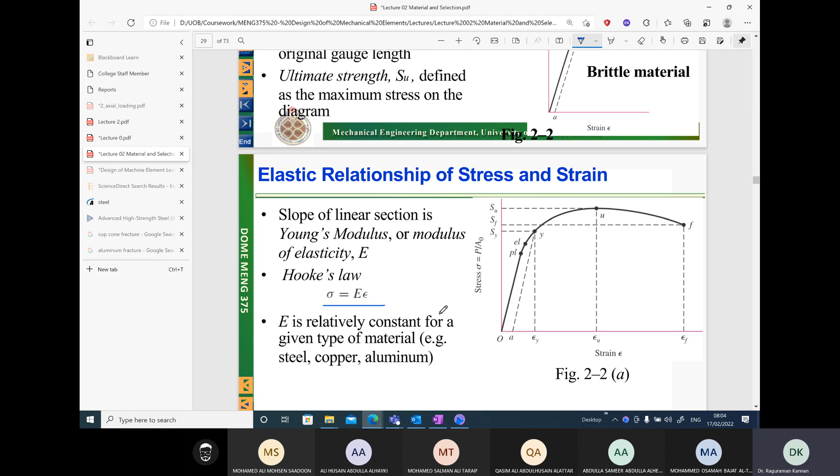Okay, so we'll continue from last class. If you recall, we went through the tensile test and I briefly discussed different properties: ultimate tensile strength, proportional limit, yield strength, and fracture strength, and regarding Hooke's law, for ductile materials and brittle materials.

Now we will go for compression. In the case of compression, how do materials behave? Generally, for ductile materials, the ultimate strength in compression and tension are equal. The properties are generally equal.

But there are exceptions. For some ductile materials, this is not the case. Ultimate strength in compression and tension can be different, especially if the ductility in the material is approaching that of a brittle material. So what is ductility?

We will define that as well. Ductility could be defined as the strain at fracture. So it is equivalent to the strain at fracture. If the strain at fracture is very large, then it is a ductile material.

But if you take a brittle material, the strain at fracture is going to be very small, reaching the elastic strain or the proportional limit strain. It will approach the strain at the proportional limit. The strain at fracture will approach the strain at yield point. If that is the case, then it is a brittle material.

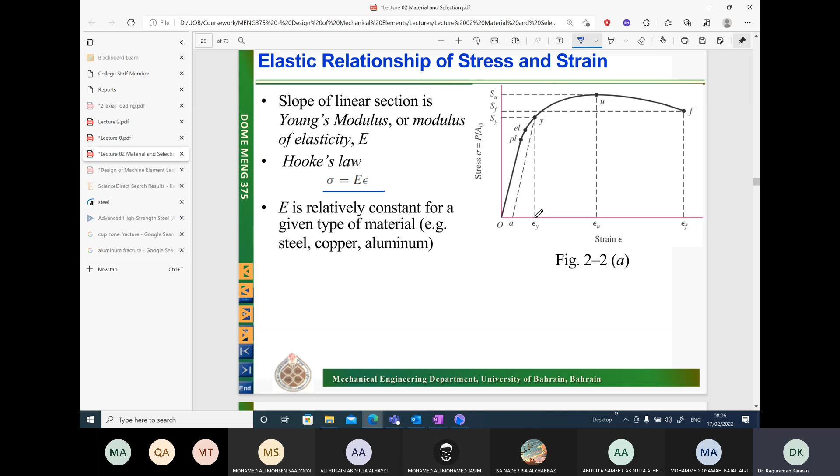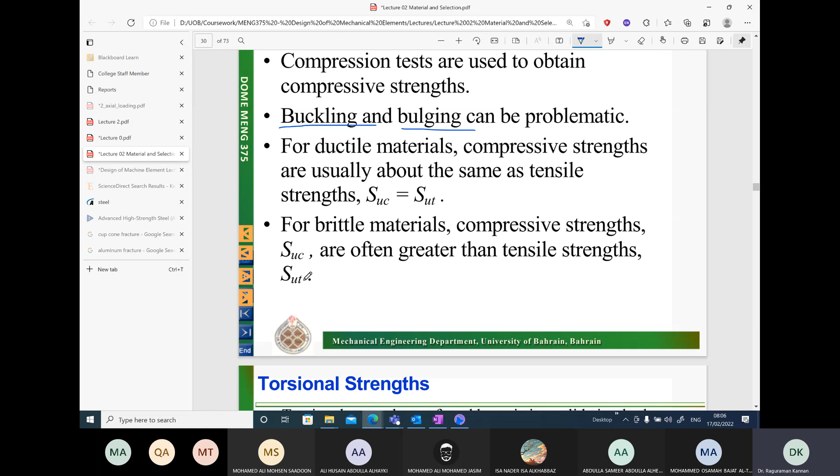So especially for ductile material, if the strain is coming closer and closer towards the yield point, then you may have a condition where the ultimate strength in compression will be different from the ultimate strength in tension. For brittle materials, always the ultimate strength in compression and tension are different. Compressive properties are different from the tensile properties.

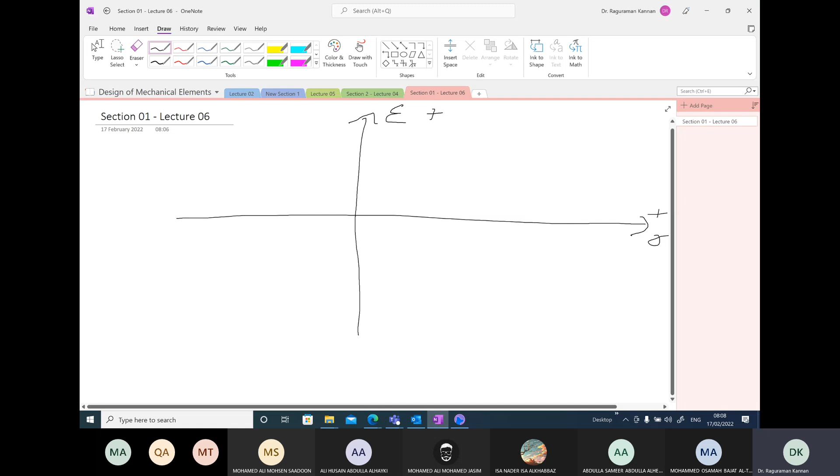So now it's okay. If you take a brittle material and look at the stress-strain diagram, let's say this is the positive stress, positive strain, and then we have the negative strain and the negative stress. Sorry, this should be stress and strain, I made it opposite. Should be stress, strain.

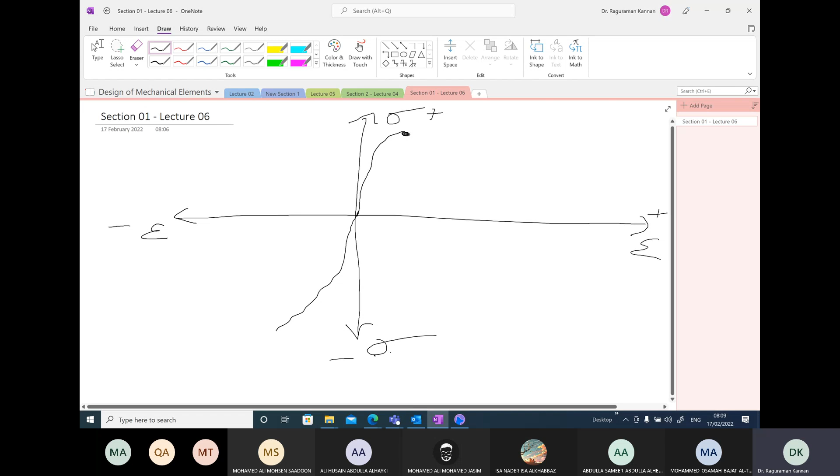So if this is the case, generally for brittle materials, this is what you are going to observe, then fracture. On compression, you are going to see much larger values like this, fracture here. So in compression, you will have different properties. In tension, you have different properties, especially for brittle materials and some ductile materials as well.

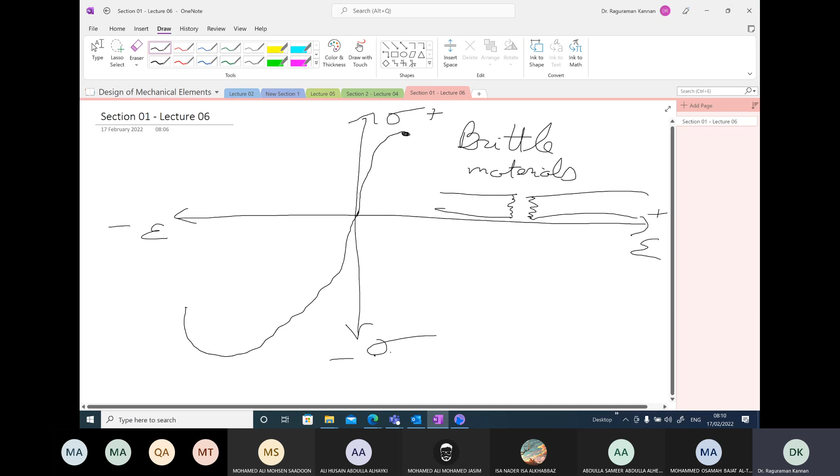In tension, you had cup and cone fracture for ductile materials. For brittle materials, you will have a straight edge. So if you see the fracture, especially in tension, the fracture will be with a straight edge. While you go for compression, what happens? You are going to see probably some bulging effect like this, and then fracture.

Okay, so what about torsion? We can also do torsion tests. In the torsion test, you are going to get a torque versus twist diagram. There you can use strain sensors, strain gauges to measure twists and then draw the torque versus twist diagram. From the torque versus twist diagram, you should be able to calculate the shear stresses.

How do we calculate shear stress? We can calculate shear stress using the formula: torque times the radial distance. So radial distance, I'm going to write it as R, over J, where J is the polar moment of inertia. So we can convert applied torques into shear stresses, and there will be shear strain.

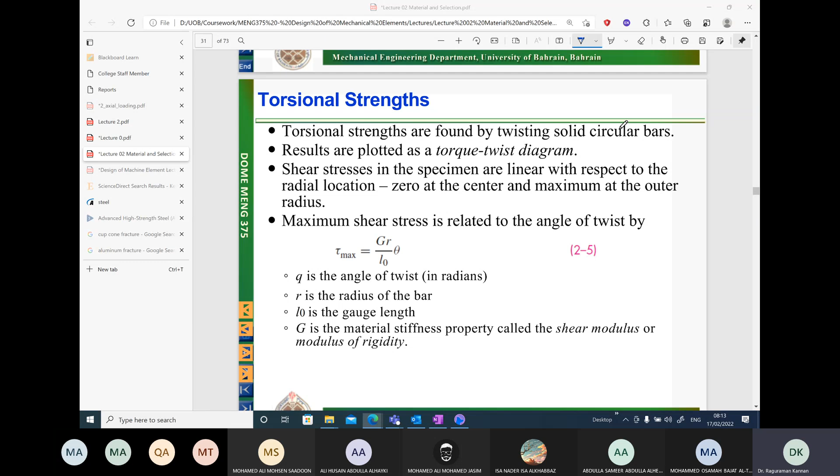How does the shear strain diagram look like? It will look very similar to your normal stress strain diagram. You will have a yield point, then reaches a maximum value, and then fracture.

So in this case, in the initial part, we will get what is the shear modulus. Based upon the shear modulus, we can write the Hooke's law for shear stress. So we can write tau is equal to, let us say, G times gamma.

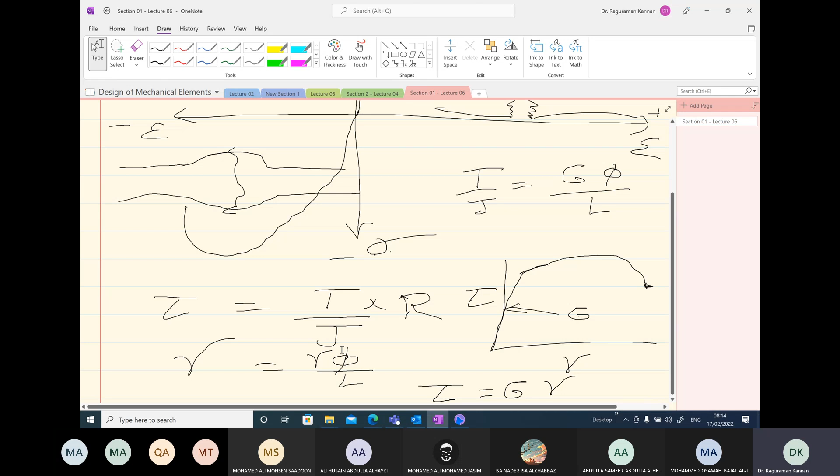Based upon this relationship, we can come up with a form of strain equation. So the strain here should be phi times, radius r could also appear here.

There is another property which is called the modulus of resilience. What is modulus of resilience? In the stress strain diagram, we have the area underneath the elastic part of the curve.

Within the elastic part of the curve, this is the elastic part, before the yield point, we can call it elastic region. And between the fracture point and the yield point, it is called the plastic region.

So the area of the stress strain curve under the elastic region is called the modulus of resilience. What does it give you? It gives you the energy absorbed per unit volume without undergoing permanent deformation. So it gives you an idea how much energy can be absorbed by the material under quasi-static loading. This is not under impact conditions, but rather under very slow loading rates, how much energy the material can absorb, that is given by the area under this curve.

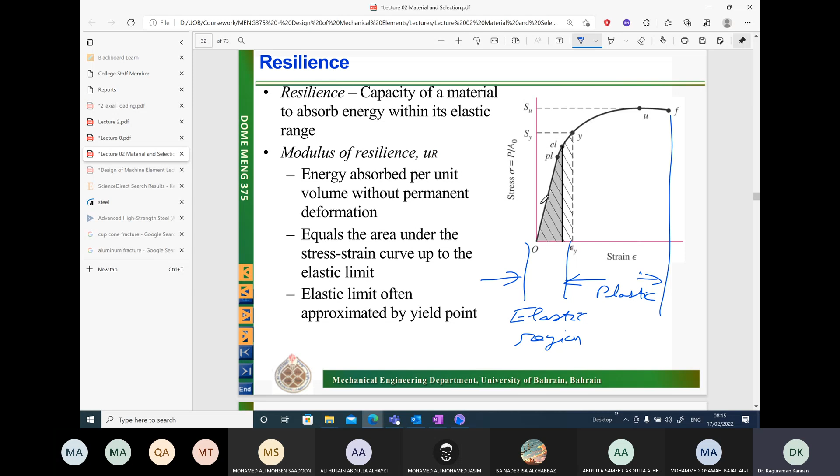So if you were to measure the modulus of resilience, how do we measure it? By taking the area under this curve, half into base into height. So we can approximately take this height to be the yield strength. Half times Sy times the base length here will be equal to the yield strain value. Approximately this is equal to this value here.

We can use the Hooke's law within the yield point. Let's assume up till the yield point the Hooke's law is valid. We can replace the strain, yield strain, by yield stress over E value, and then approximately write the modulus of resilience as this. But if you look at the units here, Sy has the unit corresponding to it, pascals, which

is equal to Newton per meter square. And if you take the strain unit, strain is dimensionless. So what is the unit of this product? It's still Pascal, Newton per meter square. But here, modulus of resilience has the unit of energy. UR is supposed to have the unit of energy, but energy per unit volume.

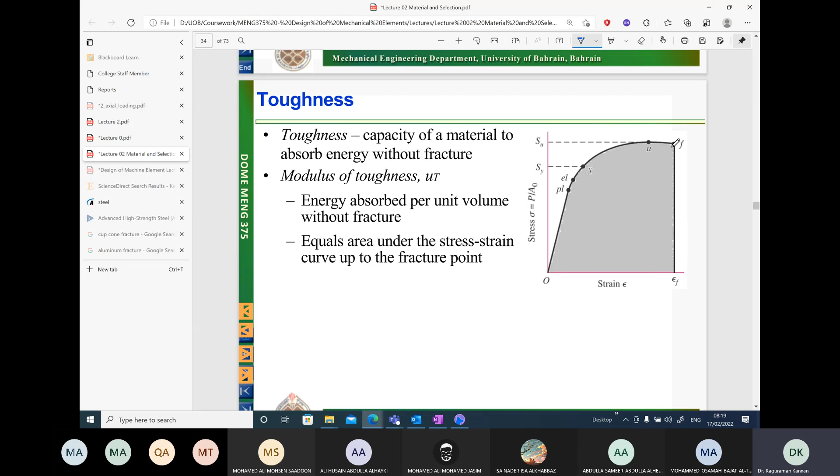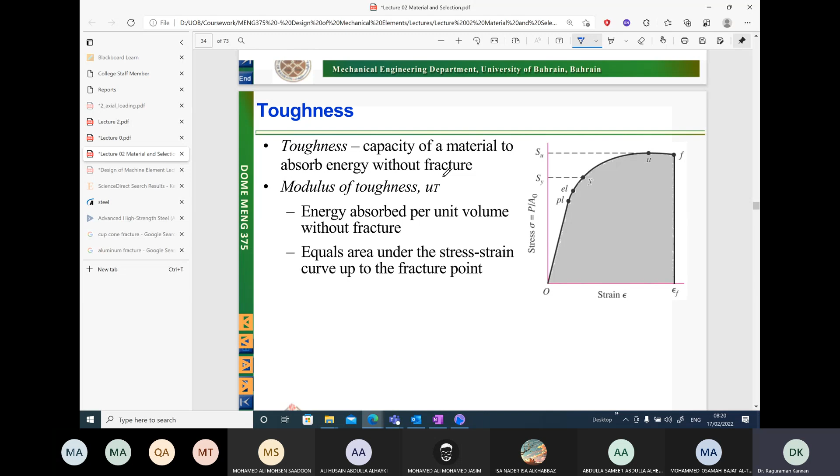Toughness is the total energy the material can absorb before undergoing fracture. This total energy per unit volume is given by the area under the stress-strain curve up till fracture. This modulus of toughness property cannot be used in situations like these pads.

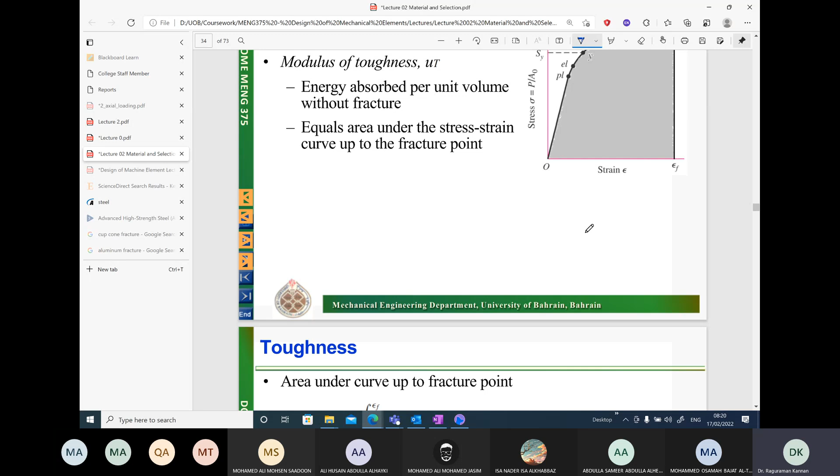Now we have to realize, suppose if you have some other padding material which is absorbing energy under impact conditions. In those cases, we cannot use modulus of toughness or modulus of resilience because those are under impact conditions, while these energies are under quasi-static loading, that is, a very slow rate of loading, not a high rate of loading as in impact conditions.

An example of impact conditions: in bridges, you might have seen big columns, and if you carefully observe, you'll see some kind of padding around them, especially around the base. Why are these paddings given? If some vehicle comes and hits at a very high velocity, you don't want the column to break. Rather, this padding will absorb all the energy of the vehicle and protect the column.

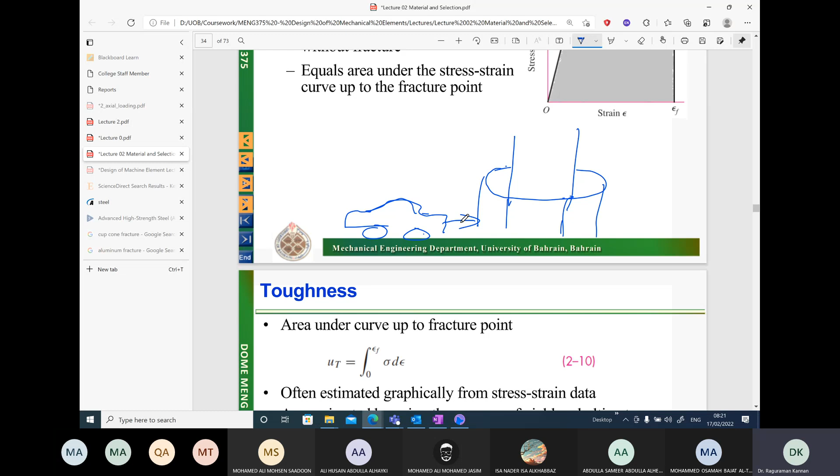So this is under impact conditions, and under impact conditions, you cannot use modulus of toughness or modulus of resilience. It will be wrong to use these.

So how do we calculate the area under the curve? Usually we will have some approximate relationships in the plastic zone between stress and strain. These relationships are just like Hooke's law, generally called constitutive relationships or constitutive equations. Hooke's law is one example, where sigma equals E times strain, within the elastic and proportional limit. But beyond the yield point, sigma may be a function of strain.

For example, there is one simple power law relationship: sigma equals A times epsilon to the power n. So under the plastic part, you may have multiple relationships for different regions, and using these mathematical relationships, you can integrate and figure out the area under the curve.

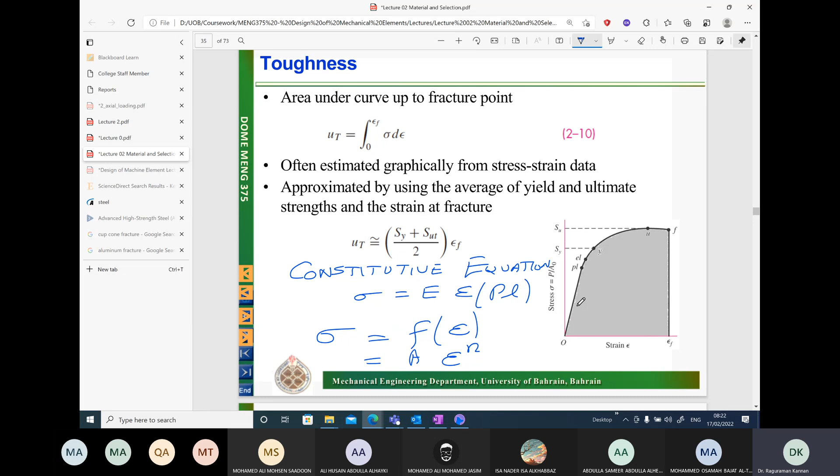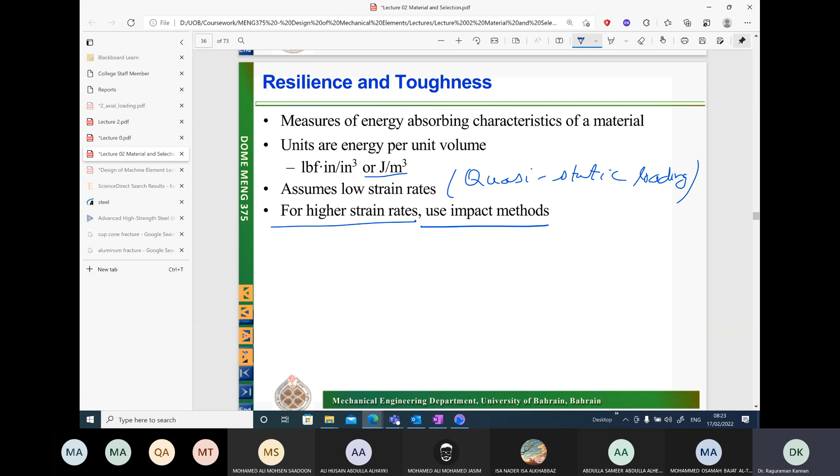We have already discussed the units, joules per meter cube in SI units, with English units given here as well. This measures the energy absorbing characteristics of the material, and it assumes a low strain rate, meaning quasi-static loading, or slow loading rates. However, for higher strain rates, we cannot use these properties; we have to use impact methods, which we will see later.

Cold working - what is it, and what does the process do? Cold working increases the yield strength of the material by plastically deforming it below the recrystallization temperature. Can one of you tell me what is recrystallization temperature?

Can anybody explain to me what is recrystallization? The crystals change shape. What do we mean by crystals? What is a crystal? Like BCC and FCC structures. Okay, BCC structure. But what is recrystallization? What does it mean? Does it mean that from BCC it becomes FCC? What does it mean?

So if I say I'm working below the recrystallization temperature of steel, what does it mean? It means reforming of the metallic bond. No, not actually that. So how, just by applying mechanical forces, would that happen? This is about temperature, right? So are we melting it? Are you saying that recrystallization temperature is the melting temperature of the solid?

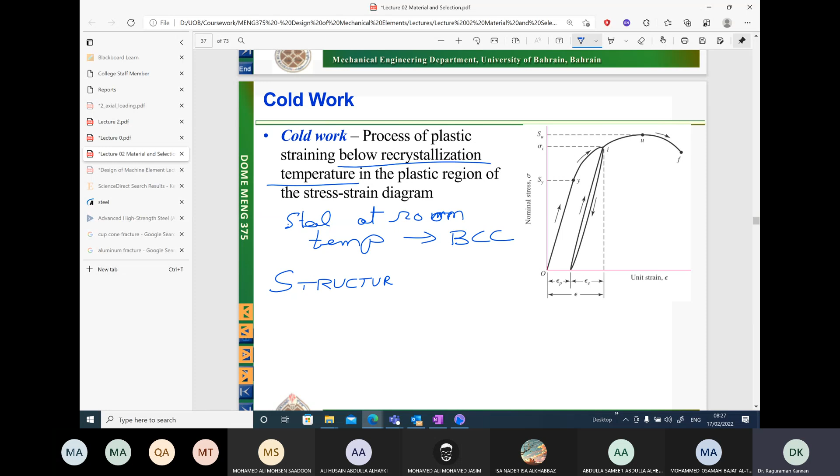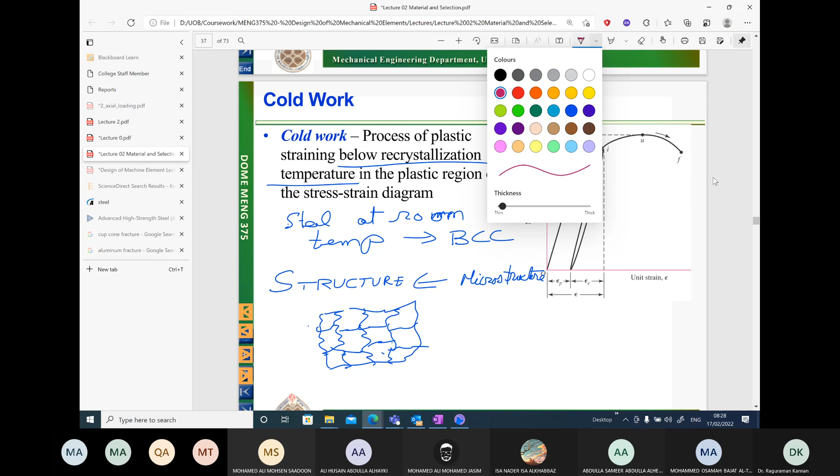Microstructure - if you look at the surface of any material under a microscope, you are going to see grains. What are grains? These grains refer to the specific orientation of the BCC structure within the material, in the case of steel. In one grain, the orientation of this BCC structure may be like this, while in the neighboring grain it can be a different direction. Why do we have these different directions in each grain?

Because when solidification takes place for the material, suppose you have liquid material inside a crucible. As I cool the material down, at various points solidification will take place, and the BCC structure will start to grow in different directions.

So here it will grow in this direction, and here it will grow in this direction. Slowly the grain size will increase. Here it will grow in a different direction and the grain size will increase. Similarly, when solidification takes place, there are different points where solidification occurs. The size of the grains grows, and the direction in which the structure grows will all be different. Finally, they meet at certain points, and these points become the grain boundaries.

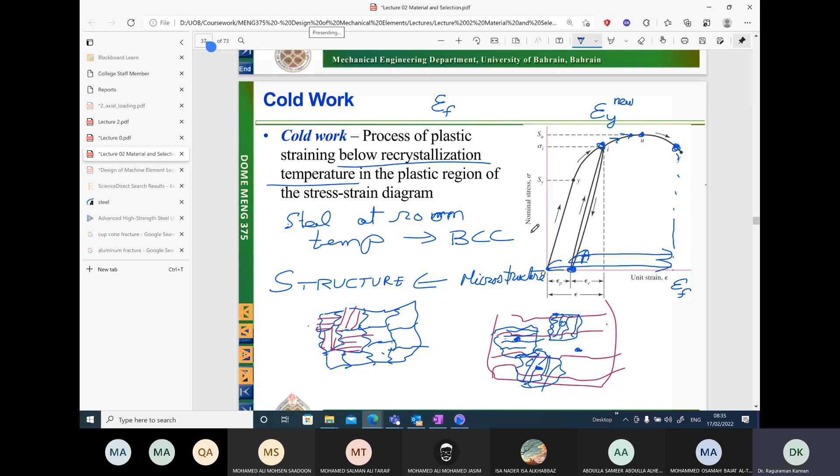We have seen before that advanced high strength steels overcome this limitation of cold working process by applying other manufacturing techniques, including heat treatment, cold working, mechanical processes, and adding additional elements within the material, causing precipitation of certain materials within the microstructure of the steel. Thereby it will increase ductility. What we have seen here is ductility reduces as yield strength increases. If ductility reduces, the ability of the material to absorb impact loads also decreases. But in sophisticated manufacturing processes, not only does yield strength increase, but fracture toughness also increases for the material. Fracture toughness or ductility also increases.

Now let's go to a property called hardness of the material. What is hardness? Can any of you define it? Have you heard of this term? The strength of the material to resist a localized pressure, or localized deformation. So, strength of the material to resist local plastic deformation. That's a good definition. Let's not write it as strength, because strength is a well-defined property for a material. Rather, we should say ability of a material to resist local plastic deformation. This is the general definition that is given.

When I ask you what is the definition of stress, how will you give the definition of stress? How is stress defined? Anybody? Force applied over a certain area. Right, so I can write a formula. When I say stress: internal force over area of cross section.

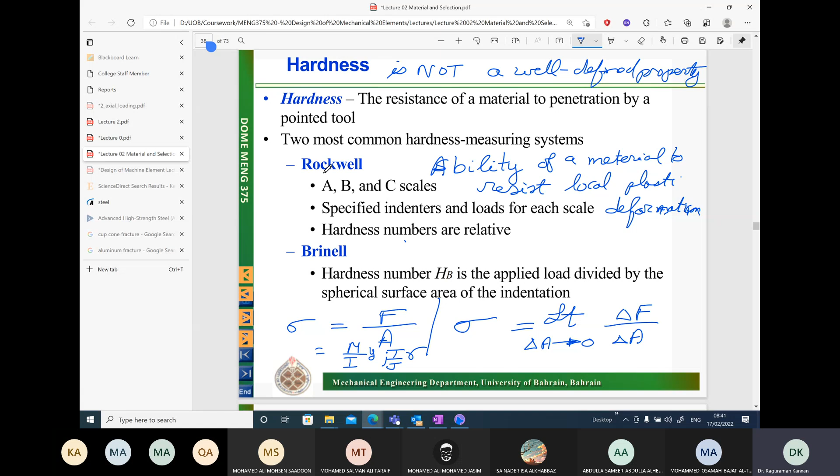Have you seen such a single mathematical formula for hardness? Again, stress is well defined with a single formula. No matter what test I do, if I want to mathematically calculate stress at a point, this is the formula I will use. It doesn't matter whether it is a torsion test, tensile test, compression test, or bending test. Have you seen such a well-defined formula for hardness? No, because hardness is not well defined. Yes, that is the answer. Hardness is not a well-defined property. In fact, there is no formula for hardness like there is for stress. We can use some theory and derive these formulas. If you go for hardness, what is the theory? Have you seen any theory? No theory also. No theory behind hardness.

What do we have? Just the layman definition. That is all we have. What is the layman definition? Ability of a material to resist local plastic deformation. What the hell does that mean? How do I calculate anything out of this? Nothing. It means nothing.

So what the hell is hardness finally? We really do not know what we are measuring. We do not know what we are doing. But somehow we have a feel of what this property of hardness is, just a feel.

Okay, and what do we do in the Rockwell test? We have different shapes of tools which go and penetrate the surface of a material locally, and when it penetrates, we apply different loads in each case.

In Rockwell, Brinell, Vickers, who decides what amount of load I should apply? Based on what? Nothing. So we do some experiments, but we do not know what we are measuring, why we are applying certain force, why the tool bit used for penetrating a particular material has a particular shape. None of these we know.

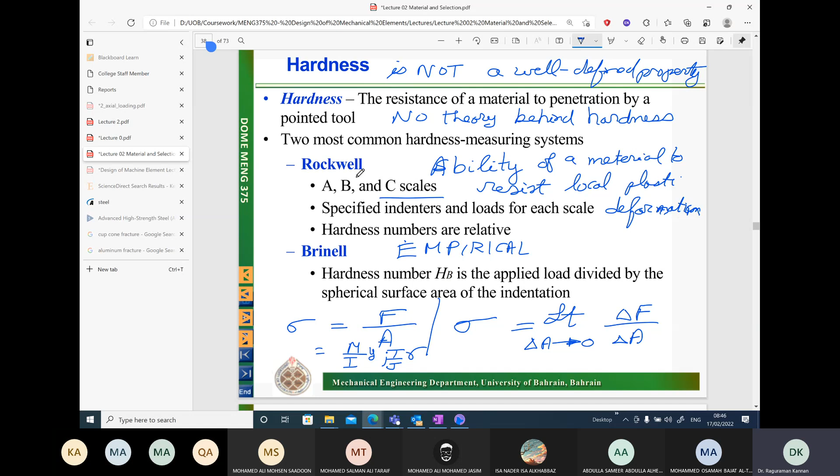So this is one practical application of these hardness values. There is also another practical application. There is a way to empirically relate these hardness numbers, these relative numbers, to a property like yield strength. We can empirically relate them through graphs, and by doing so, we can get the yield strength and the ultimate strength for steels. The empirical relation gives this based upon, let's say, Brinell hardness number in SI units and English units.

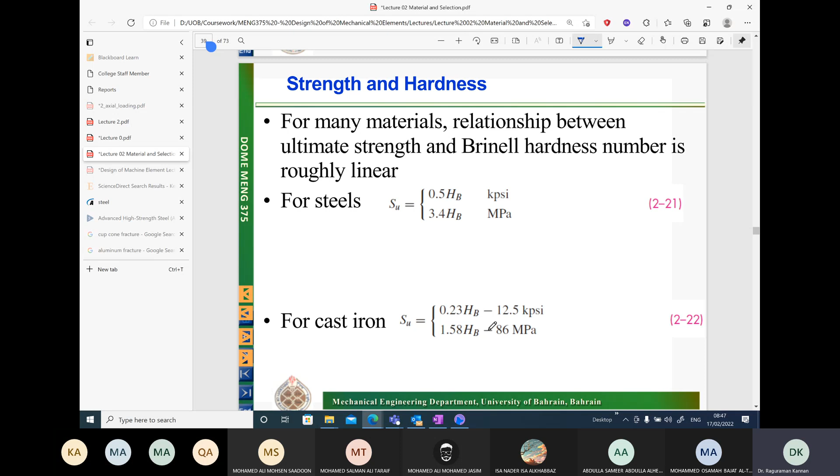For cast iron, another empirical relationship is also given. Again, these are empirical formulas, not based upon any theory. What is the use of these formulas?

Suppose you are in a field and you want to test whether the imported materials are according to the standard. You cannot pick each and every material, go to the laboratory, do a tension test, and destroy the material. Rather, what you can do is use portable hardness testing machines. You take a sample, test the property — what is the hardness of the material — then use these empirical relationships and deduce whether the strength of the material is according to the standard you have. So that is another use for these hardness properties.

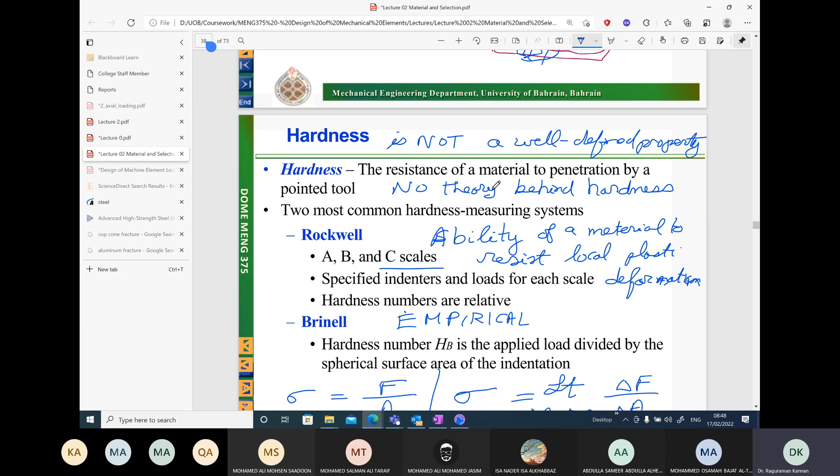What is the unit of hardness? Generally, since it does not have a proper theory, assigning a unit to these hardness numbers has no meaning. However, for practical situations, whenever I use the formula, inside the formula I can do some calculations based upon some units.

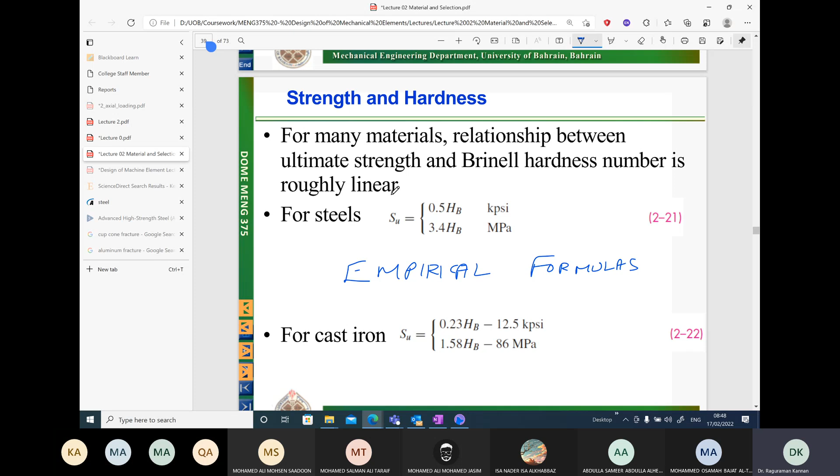For example, if you take the Brinell hardness formula, you may have a specific formula with some force quantity and some numbers based upon the radius of indentation, some function you might have, like the square root of f of r.

In what unit am I going to substitute R, in what unit am I going to put the F value here? We can see the different units, right? If you want it in KPSI, the hardness value HB also has to be calculated appropriately. When I substitute, I can put R in meters, R in millimeters, F in kilonewtons or newtons.

What unit should I use here? For clear specification on how I calculate HB, I will have units associated with it. When you are publishing data, you will have units associated with it for this reason. Not that hardness itself has a unit. Did you guys understand what I said? The property hardness does not have a unit. However, for convenience sake, they will put units when they publish the data. So that is the reason.

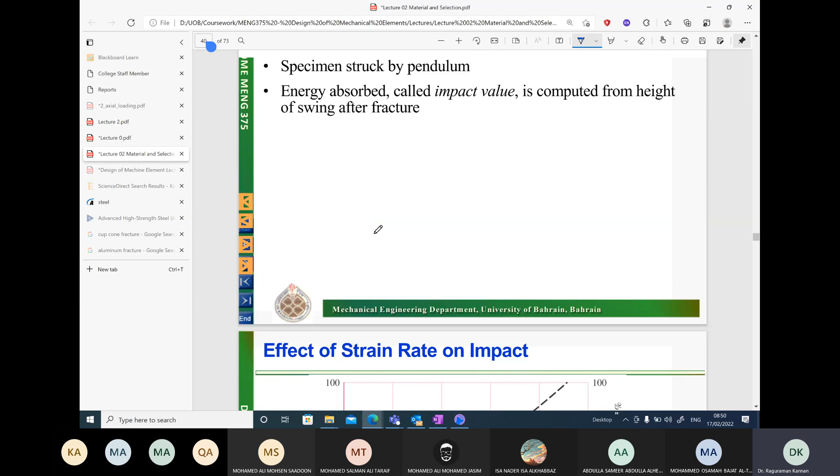So we have seen that, now we go for impact properties. There are various kinds of impact tests, Charpy test, Izod test. Charpy test is usually done to approximately identify what is the ductile to brittle transition temperature, another property we will discuss in this slide. But before going there, Charpy test is used for approximate identification of another property. Izod test may actually produce some material property data for impact tests.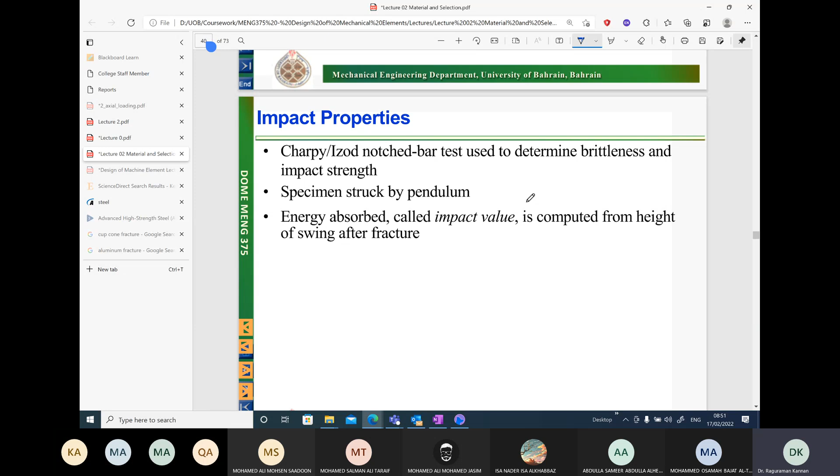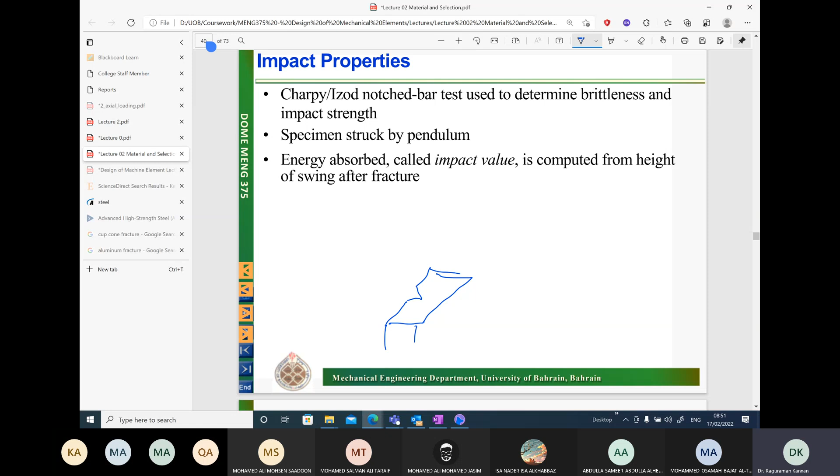So in both these tests, what do we do? Approximately, this is the case. What we do is we have a specimen. Let me try to draw the specimen here with a V notch like this. So we have a specimen with a V notch, and what they have is a hammer. Generally, a hammer is tied to a dial, fixed to a dial.

Maybe I should draw it near. The dial may have a pointer like this, and then you have the hammer. The hammer, when released, will go and hit the particular sample. The sample will be fixed on a base here. When the hammer goes and hits the sample, it will break the sample, and then the hammer will rise a little bit away. So basically, after breaking it, the hammer will rise here.

So this hammer will come to this position. Now, according to the hammer position here, the dial will also change its location, and it will give you how much height the hammer has raised. So you have the initial position of the hammer, and therefore you can calculate what is the potential energy of the hammer simply using the formula mgh.

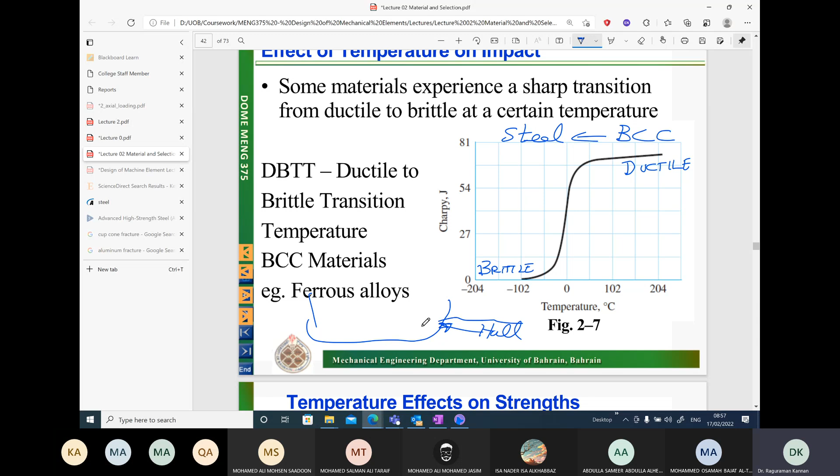The Titanic hull - what is hull? Hull is the portion of the ship here, in the water, this portion is called hull. So it went and hit against the iceberg. It was sub-zero temperature, the material became brittle, cracked, and failed. The water went inside the ship and it sank. So this is one of the reasons for the Titanic failure.

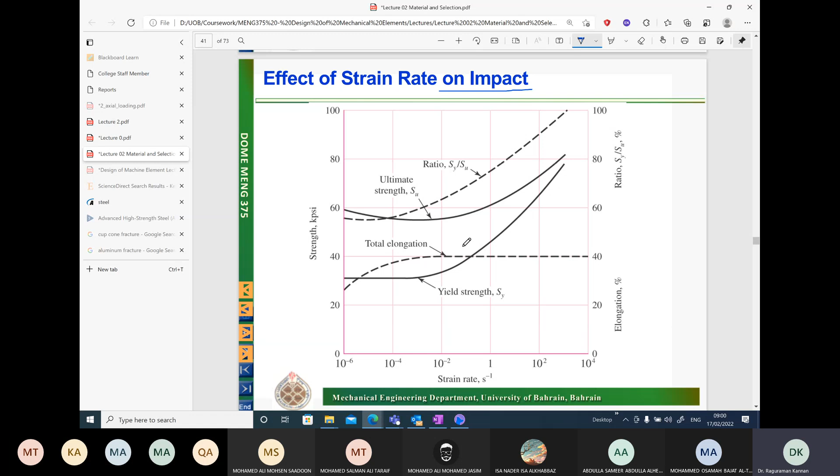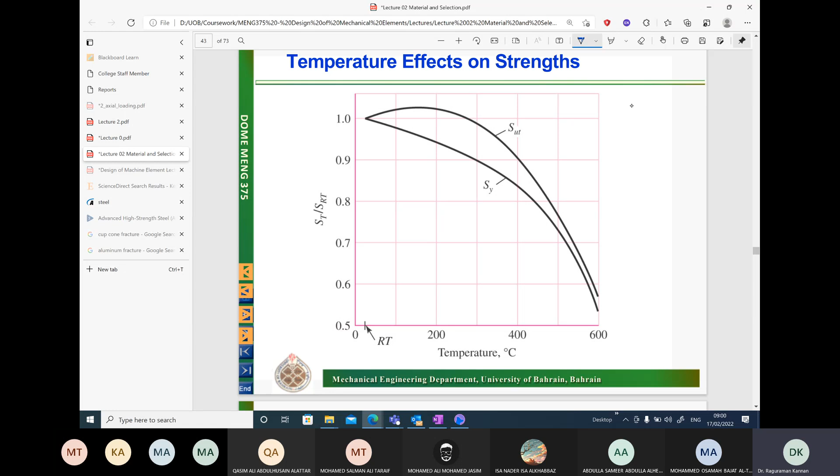So we already went through this - temperature effects. What happens to properties under quasi-static loading when I increase the temperature? The material will become softer and softer. And this is important to understand creep properties.

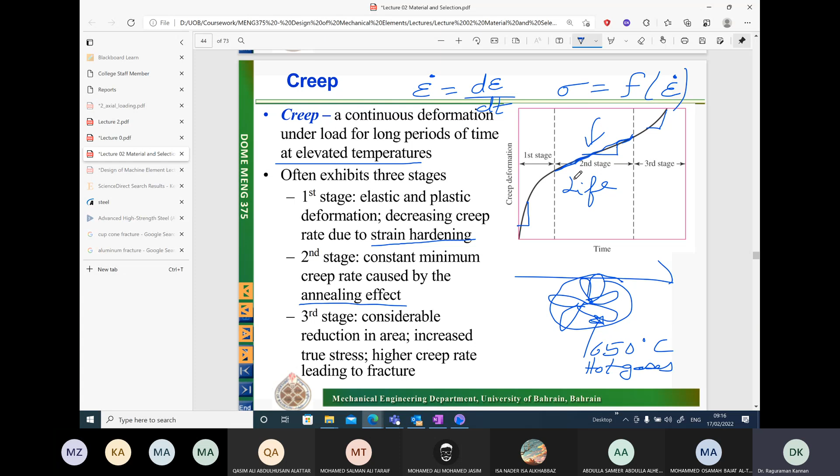So how do we determine the life of a specimen? We model creep in the second stage. Here, when we say model, we obtain the relationship between stress and strain rates. I put an epsilon with a dot above it - what does that mean? It is a time derivative, d epsilon over dt. It's a function of strain rate, not just strain. Based upon these relationships, we will be able to obtain the remaining life of the specimen. This is very important for identifying the life of members.

You might have come across the cold working process - we just went through that. There is also the hot working process, where the material is heated above the recrystallization temperature. So a process in which metal is formed while heating above recrystallization temperature is called hot working process.

Refined grain size is what you get from this process. If you want refined grain size, you do hot working. Depending upon how you cool down, you may get refined grain size or larger grain sizes - it depends on the cooling method. If you have a refined grain size in a specimen, the boundaries between the grains increase, the surface area of the boundaries increases, and it leads to high strength. Since the boundaries are higher, dislocations and slip phenomena cannot take place as easily, leading to high strength, hardness, and the material becomes more brittle.

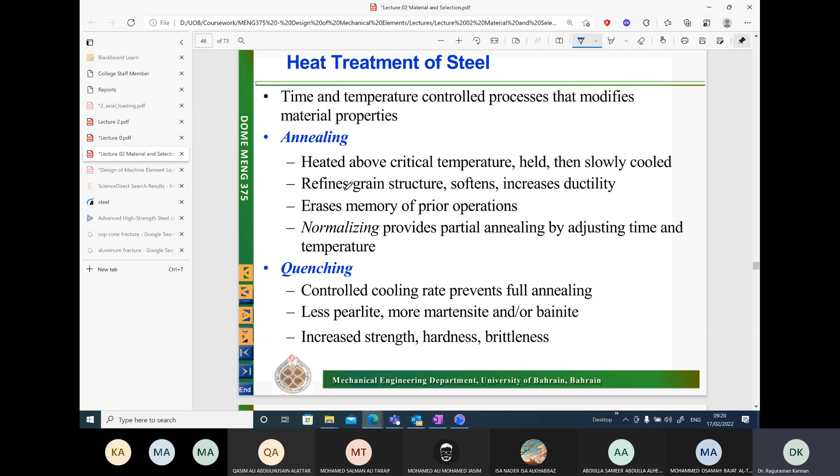These are some of the sections, cross sections. Then you can couple it with a heat treatment process to change the properties again. In what way can you change the properties? For example, annealing - in annealing, we heat above the critical temperature or recrystallization temperature, hold it there, then slowly cool down.

I think it may be wrong here, sorry for this. It should be, I think, instead of refined... this information is wrong, it's not refined grain size, it should be large grain size. Sorry for that. Hot working process, usually we cool it slowly in hot working process, so it should lead to large grain sizes. And if it leads to large grain sizes, softer the material, more ductile, and this is the reason we do hot working process. So this is wrong, please make that correction.

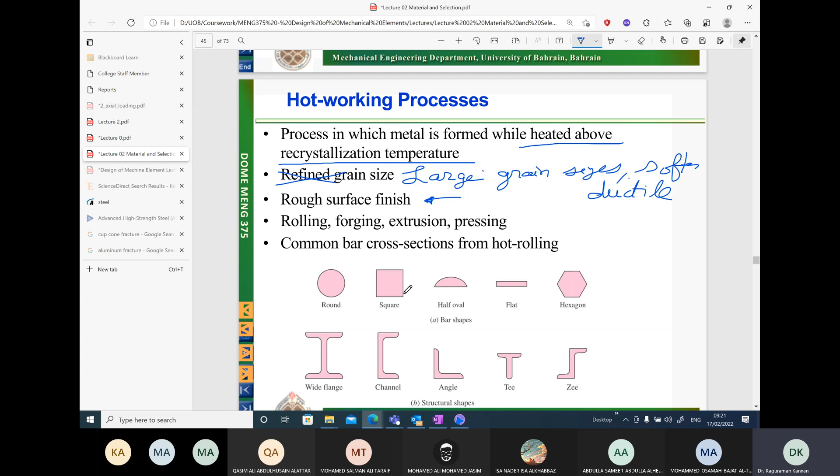I will try to change the information here as well. Okay, so again, this should not be refined, and this should be large grain sizes. Okay, large grain structure.

When you slowly cool it down, what happens? You have more time for the grains to solidify, and a large grain structure will be formed. It softens the material, increases ductility.

When you heat the material above the critical temperature or recrystallization temperature, whatever grain structure you have, that is all erased, and therefore any memory of previous deformations is also erased by this process, and new properties arise according to the large grain structure here.

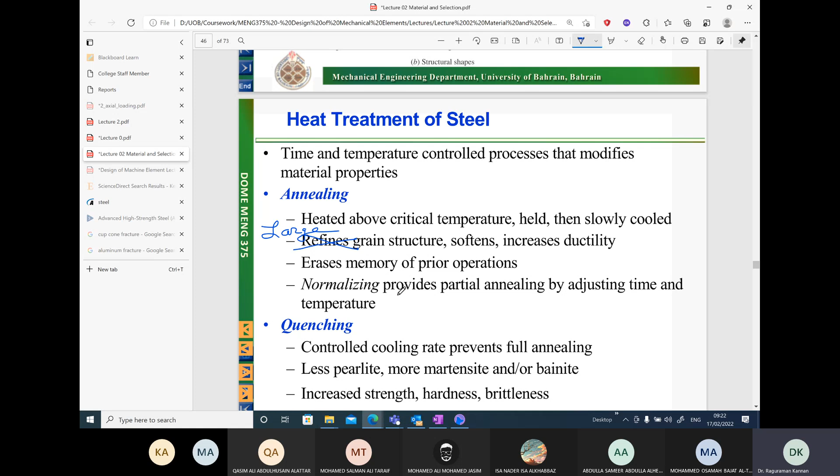Normalizing is another process which is just partial annealing by adjusting time and temperature. So we do not do a full annealing process, rather a partial annealing process. For some cases, normalizing may be required.

Quenching, on the other hand, is the opposite of annealing. In quenching, we take the material, heat it above the recrystallization temperature, and suddenly cool it. When you cool it suddenly by putting the material inside an oil bath or maybe water, what happens? You do not give enough time for heat transfer to take place, but there will be many solidification points where grain structure grows.

There is not enough time for the grain structure to grow, and therefore you will have smaller and smaller grain structure. Not only that, if you take steel, you might have gone through this in your materials engineering - you will have more and more hard materials which are formed. Why? The carbon in the steel does not have enough time to migrate from one grain structure to another, and most of the carbon will be caught in one place. When the concentration of carbon is high in one place within a grain structure, then martensitic structures or bainite structures will be formed, and these particular phases of steel have very high hardness, leading to high hardness in the material.

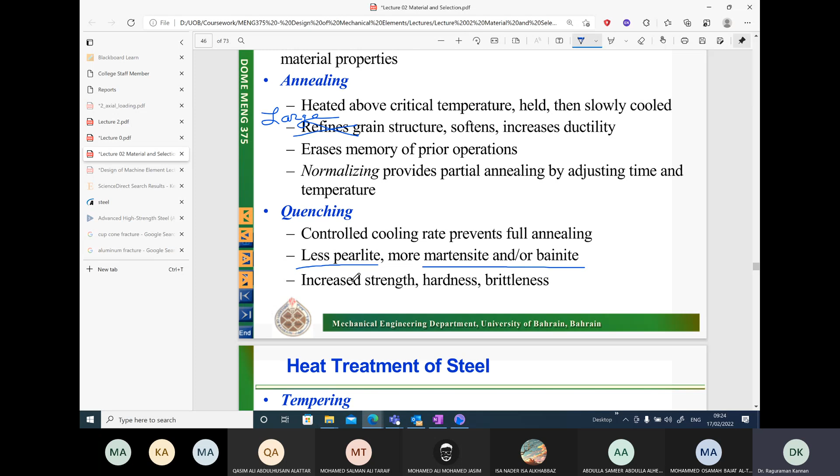Pearlite, on the other hand, is soft, but less pearlite is formed in the case of quenching, especially steel, and it leads to hard steels. Okay, it increases strength, hardness, but it becomes more brittle.

So when you have brittleness by quenching, you may combine it with a process called tempering to reduce the brittleness in the material to a certain extent. So that is one way to reduce the hardness. But besides that, tempering has other purposes - reducing internal stresses. What are these internal stresses?

Whenever you cool down a material, it leads to local thermal stresses which are developed, because each part of the material expands or contracts differently. You will have internal stresses, and this is not good for materials. To relieve them of internal stresses, you do tempering.

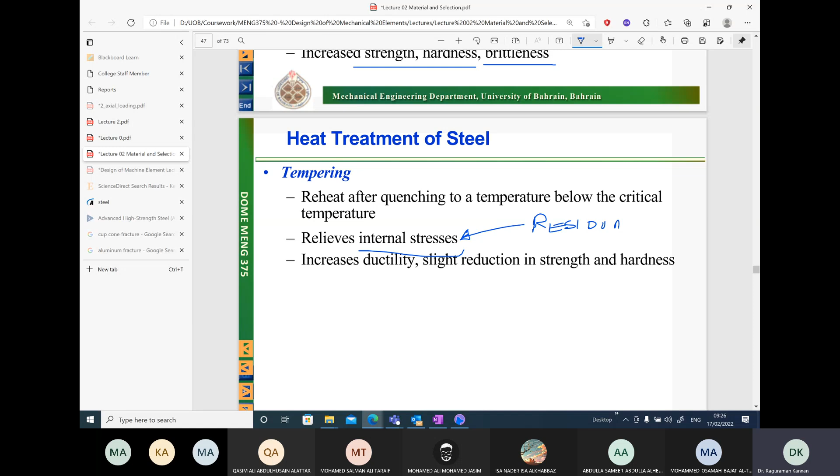But what is tempering? So you do not heat in the tempering process above the critical or recrystallization temperature, just below that temperature, and then cool it down. This way you will be able to relieve all internal stresses. Okay, so this is a very important point. Having internal stresses, or residual stresses as they're also called, in the material is not good, and usually this should be removed.

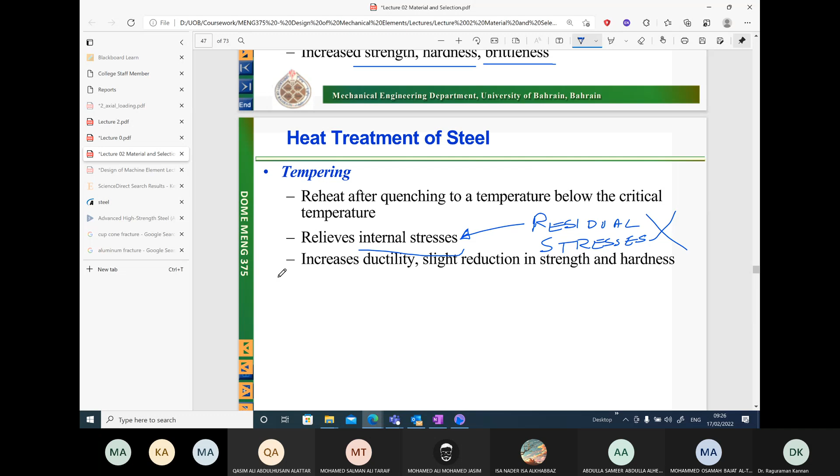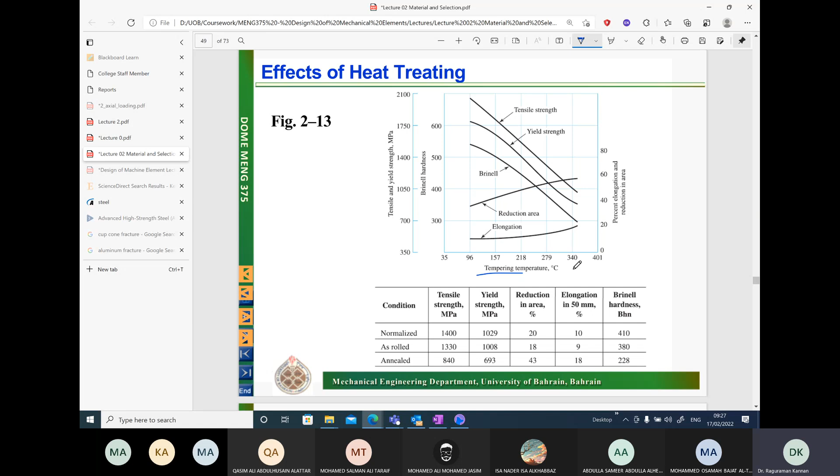On the x-axis is tempering temperature. This has to do with tempering, and what it does you can see here: significant reduction in tensile strength properties, that is increase in ductility, etc. Okay, all right, so let's move on.

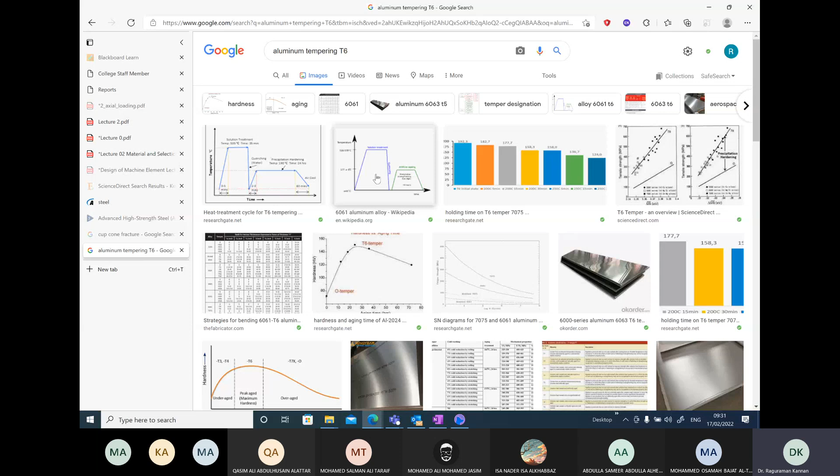And if you do these particular heat treatment processes, you will find that the yield strength of the material changes. Let's check aluminum tempering - maybe I use T6, and they give a curve. So you can see here 6061 aluminum alloy, T6 tempering heat treatment process.

So this is how you have temperature on the y-axis, and on the x-axis you have time, and it gives you exactly how to do the heat treatment. In 3 to 5 minutes, you increase the temperature from room temperature all the way up to 535 degrees centigrade. You maintain the temperature for 35 minutes inside the oven, and then you drop the temperature suddenly back to room temperature.

You quench - you do a quenching operation, put it in an oil bath or maybe in cold water, and then bring it to room temperature. Then again in 2 to 3 minutes you increase the temperature and do a tempering operation, here at 190 degrees centigrade, then you air cool. So here you are given water quenching, and here it is air cooling over a period of 60 minutes. If you do this operation, it will give you the certain desired output of the materials.

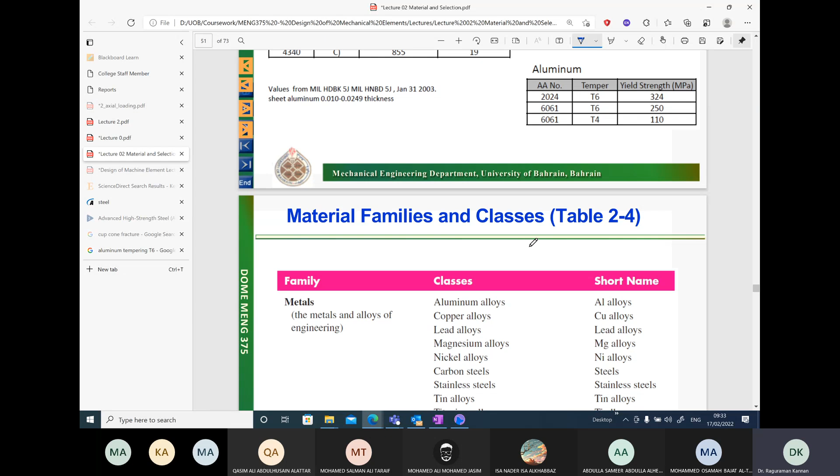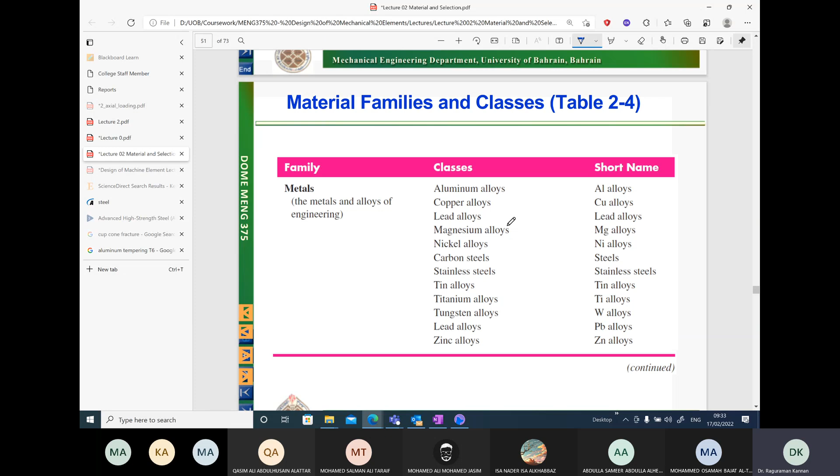We are towards the final part of the chapter. Here we'll briefly go through different categories of materials. You have metals and alloys, ferrous alloys and non-ferrous alloys, aluminum, copper, and different types of alloys mentioned here.

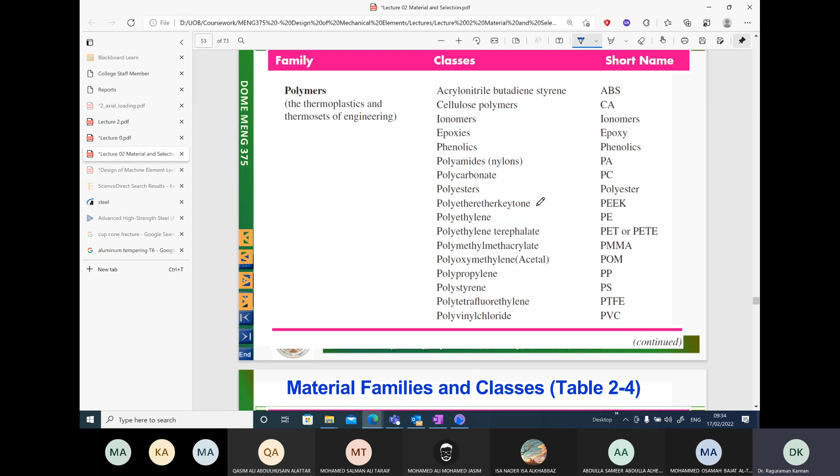Polymers we have seen - thermosets, thermoplastics, and elastomers. Some examples are given here. Elastomers are given separately - naturally occurring rubber or artificially made rubber materials. Hybrids are composites, foams, and other natural materials like wood, bamboo - all these naturally occurring materials are also hybrid materials.

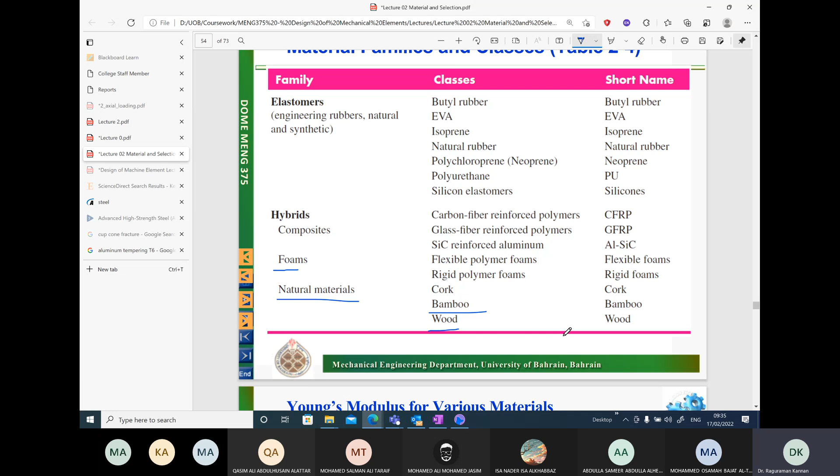Finally, we go for Ashby's charts. What are Ashby's charts? Ashby's charts will be used extensively to select materials.

In this example, what we see here is Young's modulus. According to Young's modulus of the material, we have different classification of the material given here - a distribution of materials. You have tungsten carbides with the highest Young's modulus values, reaching almost 1 terapascal, 10 power 12. And then we have other materials. Remember, this is on a logarithmic scale.

This is on a logarithmic scale, and we have alloy steels probably at 200, 300, 500 gigapascal, reaching a gigapascal value, and other materials listed. On the lower end, we have polymers. Somewhere in between, you have hybrid materials, metals, alloys, and ceramics at the top.

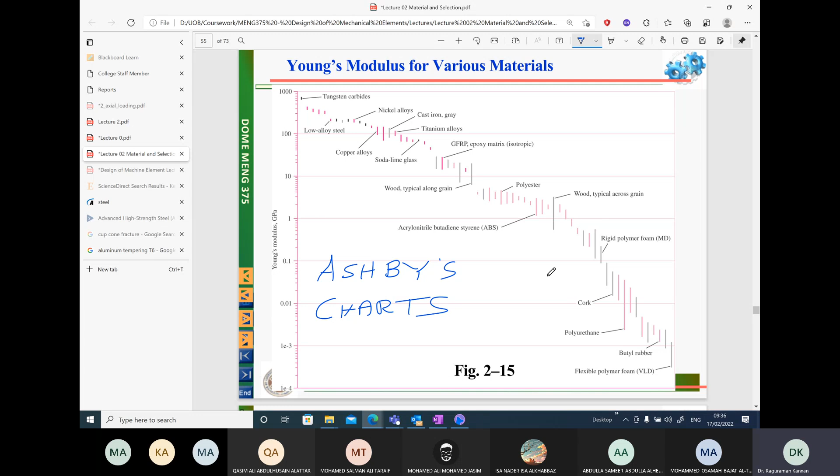We can also have a comparison of Young's modulus and density of the material. Often we want a very high strength material with low density. So we need a comparison, for example, between Young's modulus and density, yield strength and density as well. Something like these plots - these are also Ashby's charts. In this particular chart, you can see a simple example here.

You have foams - different types of foam materials are here, right here, where foams are materials used in your pillows, for example, cushion materials. These are all foams because they consist of voids, air pockets, and some soft material. Obviously, it will have very low Young's modulus value and very low density. So therefore, all the foams are listed here.

You have elastomers right here, very low Young's modulus, but density may be slightly higher than the foams. You have polymers over here, and then some naturally occurring hybrid materials also here. Then we have metals and alloys, ceramics within this grouping, then composites somewhere here, and then concrete here, along with composites.

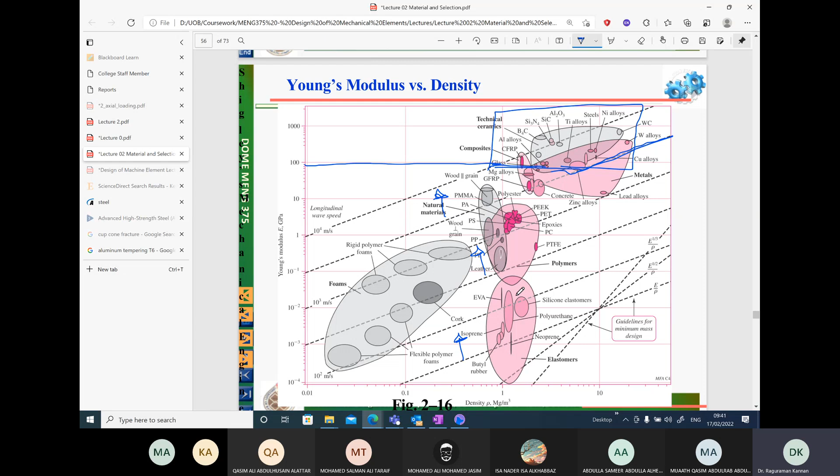We still have to see how to derive these material indices. And in your exams, you will definitely get a problem on material selection. So let's see more examples here.

So one example is given here: specific modulus, ratio of Young's modulus to density. This is selected as one of the material indices. Specific stiffness can also be selected, useful to minimize weight with the primary design limitation of deflection, stiffness, or natural frequency.

So when you choose high E over rho values, what happens? It gives you an idea on how to limit the deflection in a certain member. For example, if you have a shaft and want to limit its deflection, you will choose E over rho, or specifically the square root of E over rho, high values of these particular ratios. That will limit deflection. Similarly for stiffness.

So instead of having the property E, I can also have the strength Sy over rho. That is it, so this will be specific strength, not specific stiffness. I can also have specific strength if I want high strength, just like specific stiffness.

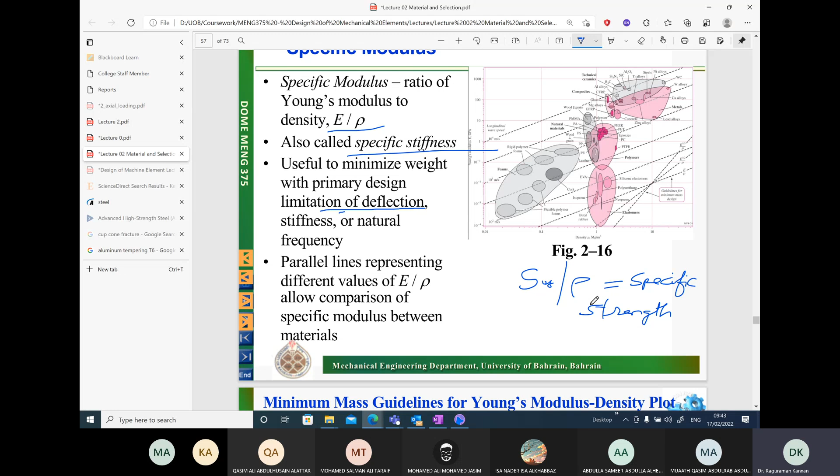So let's see here, we have one example: E power beta over rho. Beta can be taken equal to 1 for the axial loading case, and beta equal to 1 over 2 for the bending case. So let's see how to derive the E over rho ratio for the axial loading case. Please pay attention, this is very important, and in your exams you will get problems here.

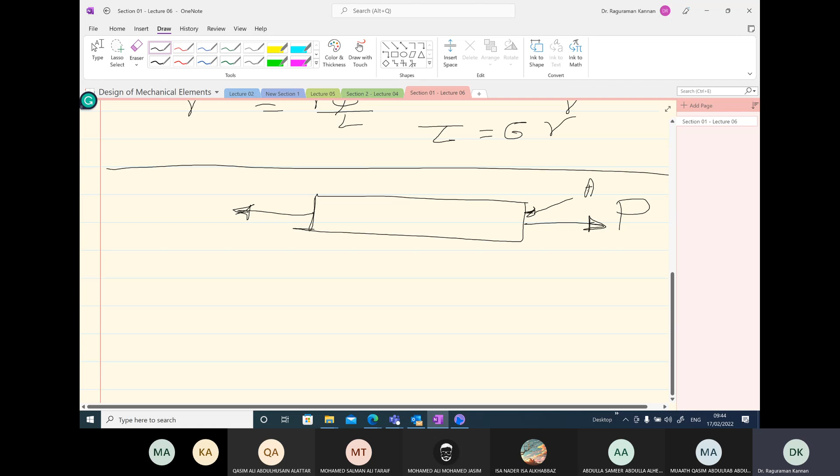So let's take the axial loading case. P is the load, A is the area of cross section. And for this particular case, I want to minimize any elongation. So what is the objective?

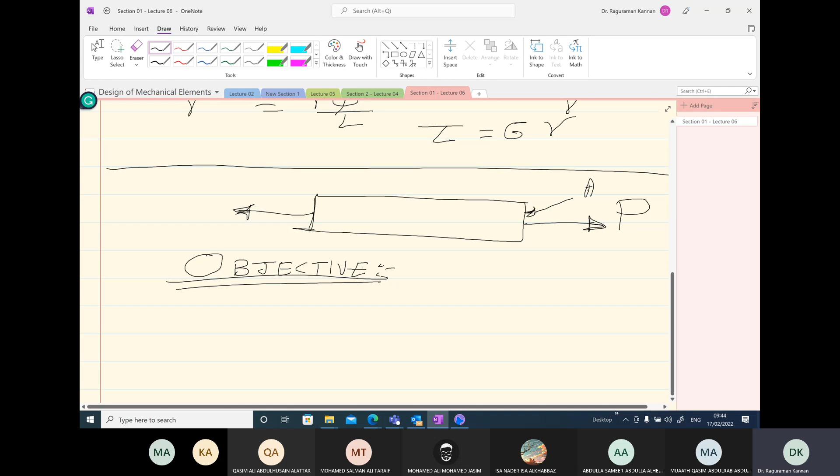So when we derive material index parameters, first we need to identify the objective. In this particular case, let's write the question as: light stiff bar. I want you to get the material index for a light stiff bar.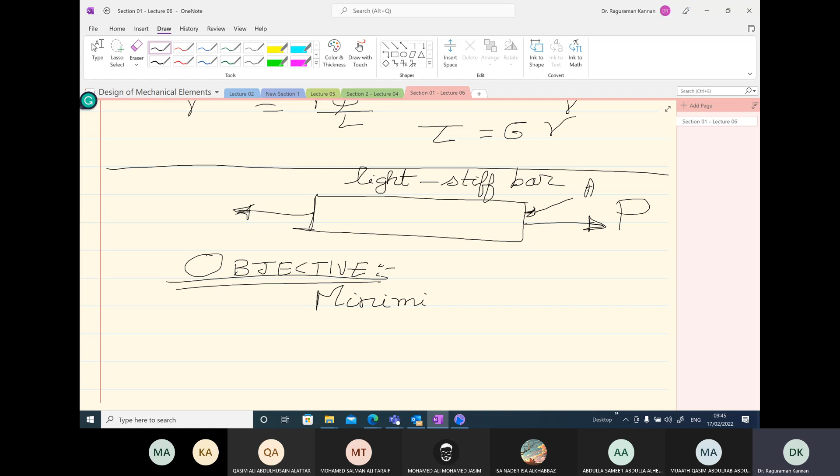So what is the objective function? Since it is a light material, minimize mass. That is going to be your objective or goal here.

Then you want to identify what are called free variables. What are free variables? Usually in your problem, I will give you some geometric data. For example, the length of the bar is fixed, and you are free to choose area.

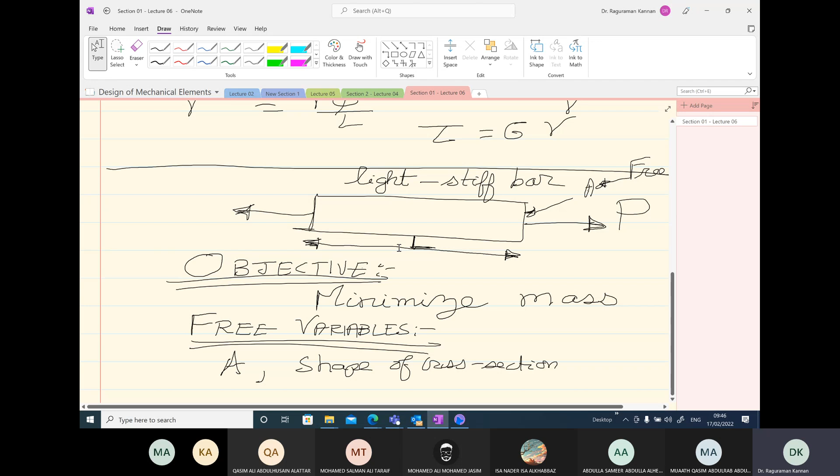So then what happens? Your free variables become area of cross section and shape of the cross section. I didn't specify what the shape should be, so shape of the cross section is a free variable. You can choose whatever you want, and fixed variables are usually the load you have, L you have, the property, etc. Okay, so based on this, I want to derive what is the material index.

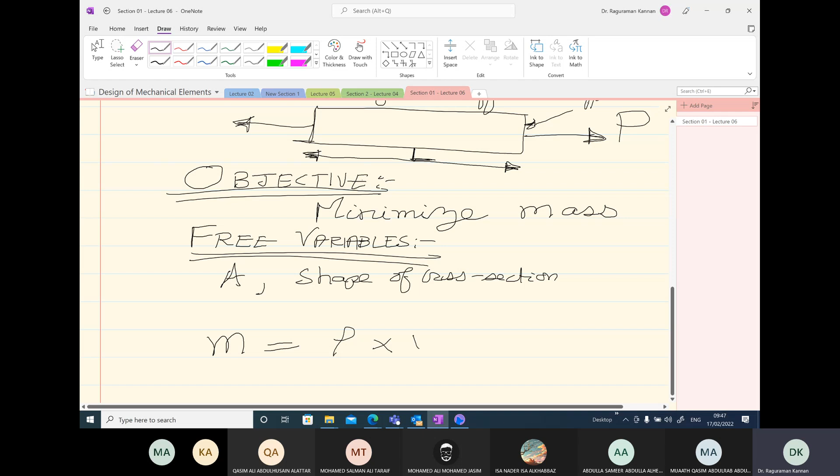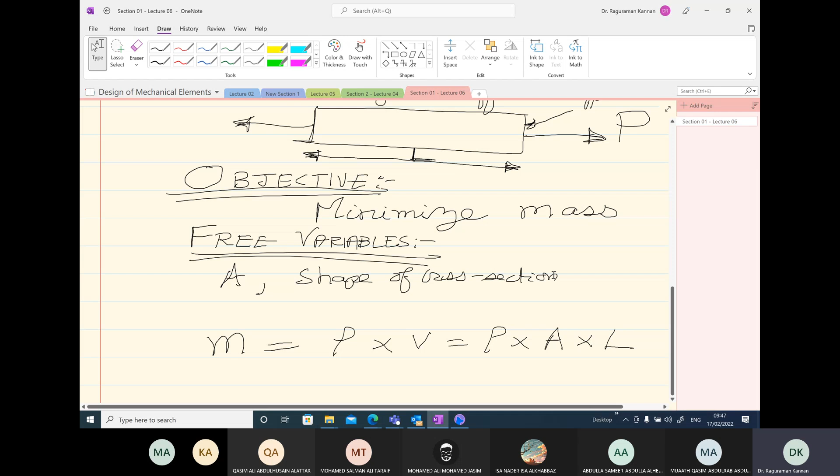Since the objective function is to minimize the mass, and I want to choose the material such that the bar is stiff, I write the equation for mass. How do I get mass? Rho, the density of the material, multiplied by volume. Volume can be written in terms of the area free variable times the fixed variable L. I cannot do anything with L, but I can do something with rho, something with A. So now how do I change it? And I need to minimize this, remember, minimize mass.

Okay, so here I want a stiff bar. So what do I do? Let's go back here and try to derive a formula for stiffness.

Since I'm interested in stiffness, I'm going to write the formula for stiffness. What is stiffness? It's similar to spring stiffness, usually defined as F over delta. If you replace the bar with a spring...

with a force F, K, we can get this relationship: F is equal to K times the elongation you have here, delta. So K can be written as F over delta. Let's say my stiffness is some S star.

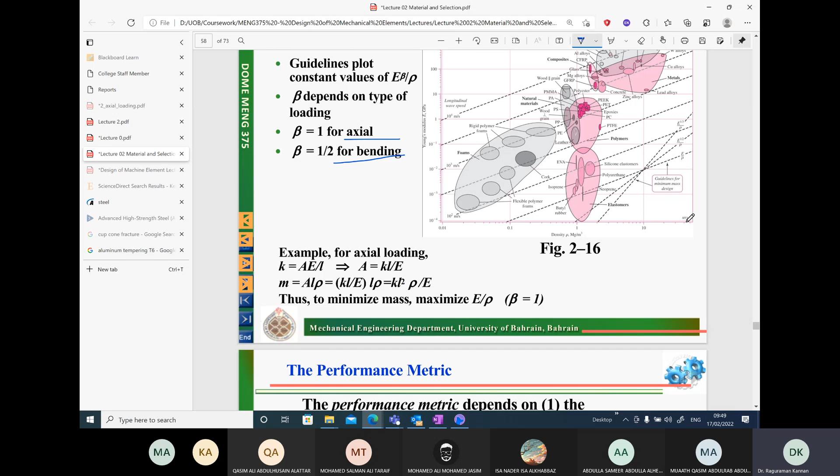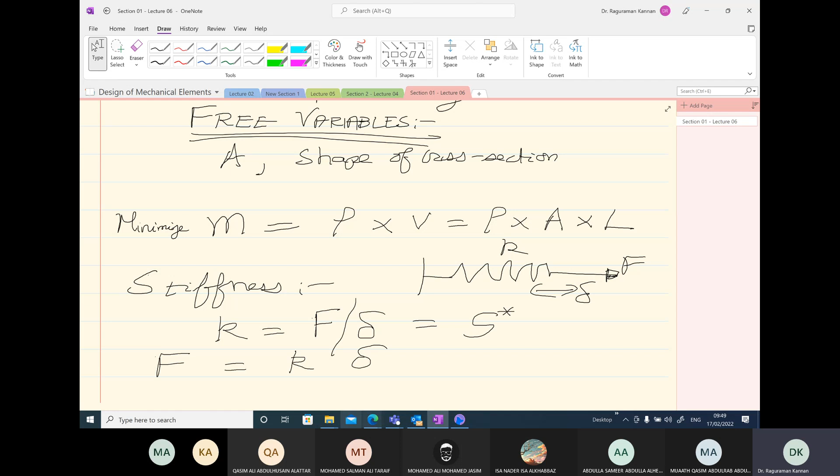Based upon this, let's see how it is derived. Now, how do we get what is the stiffness here? We compare. We can take the force F of a spring and write it as K times delta. Similarly, we can try to come up with an equation for a bar.

So how do I obtain an equation for the bar? From Hooke's law, I can write it as E times strain. I'm going to replace my sigma with the internal force F over area of cross section, equal to E times strain, replacing strain with the formula delta over original length.

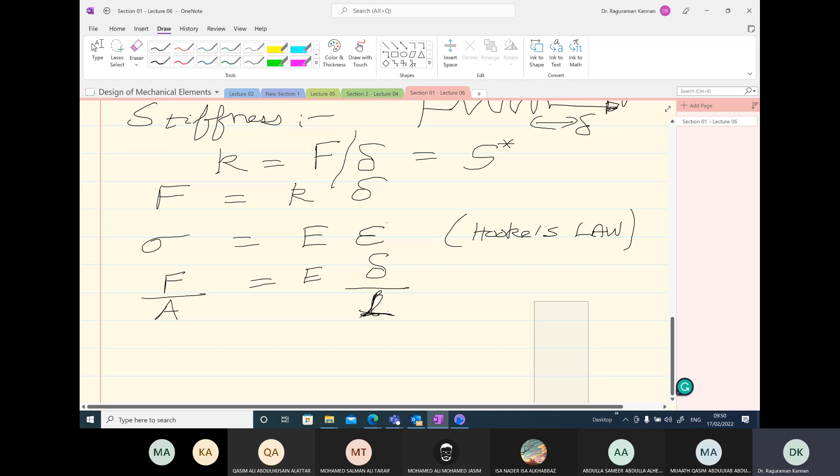Since we have the original length L, I'm going to write it as L. I'm going to rewrite the same formula in the form F is equal to K times delta. F is equal to E times A over L times delta. So this gives me what is K.

So this implies my stiffness in this case is E times A over L, and I'm going to take this guy to be equal to S star, the stiffness value, whatever value I want. Based on this, I can come up with an expression for A: stiffness times L over E. I take this expression and substitute it inside the mass term here, rho times A times L.

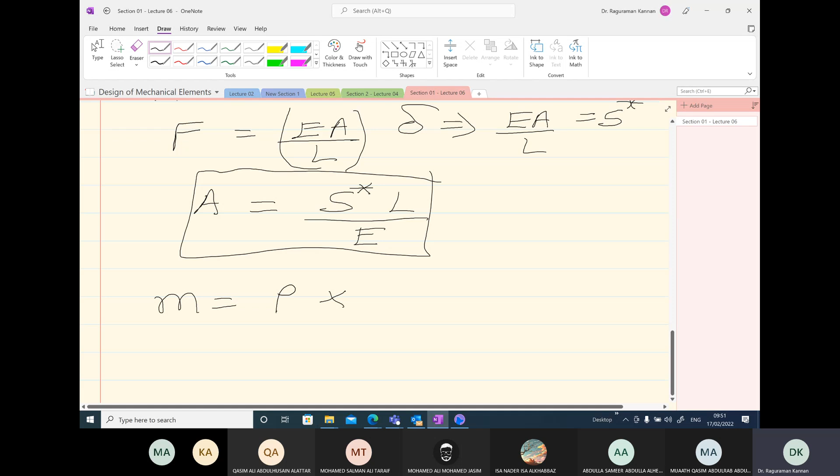Substitute here. Now what I do is group it into geometric properties, material properties, and physical properties like stiffness. If I rewrite this mass, I can separate the stiffness property separately, then I have the geometric property.

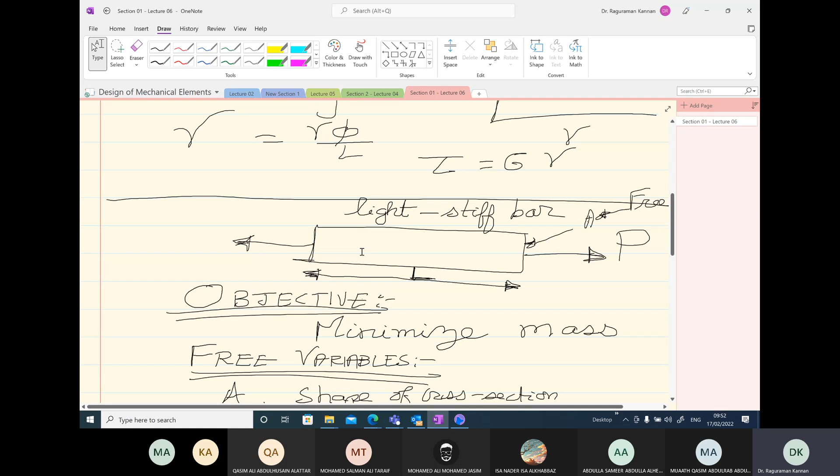What is the geometric property? L square. Then I can bring in the material properties rho and E together. By doing this, I can figure out when the mass M can be minimum. Now usually the stiffness here, by design, I would have a certain limitation on how much the bar can expand. So my stiffness property is usually limited, it's not a free variable.

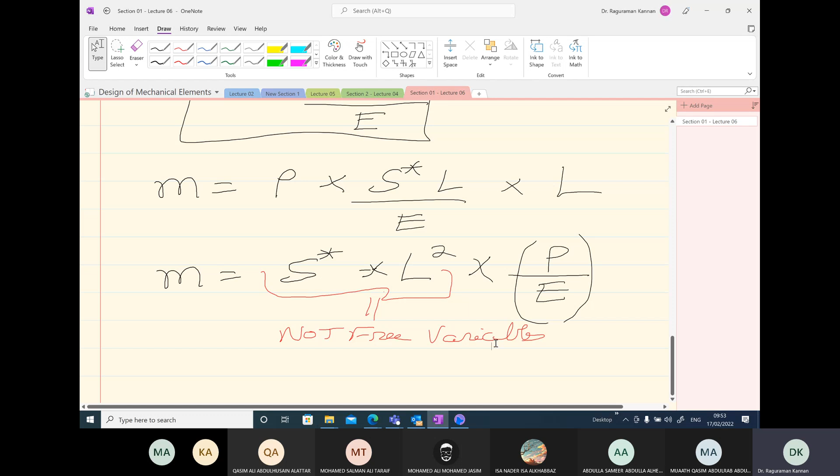So these two guys, they are not free variables. I cannot do anything with respect to these two guys to minimize the mass, but I can play with the other term rho over E. So I take my material index as the inverse of this guy. Usually we take the inverse as the material index. And material index will usually be material properties. So this is how for the axial loading case I get the material index.

Now what is my specific objective? I want to minimize mass. How do I minimize mass? By minimizing rho over E. So this guy I have to minimize. I choose my material in such a way that this ratio is minimum. In other words, the inverse of this should be maximized. So this guy must be maximized. I choose my material such that my material index is maximized.

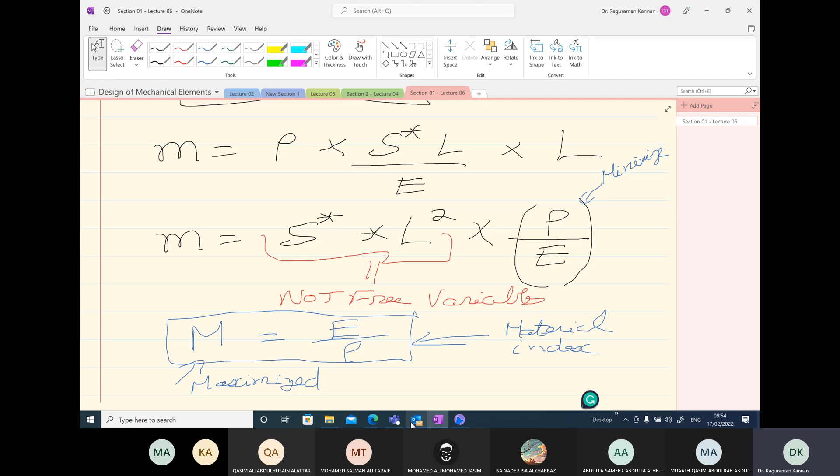Okay, so this is just one example. I think the time is almost up. I will go through other examples on how to derive material indices in other cases. For example, with respect to strength and axial loading, we will see exactly how to derive the material index for strength, and we will also see how to get material indices for other types of load.